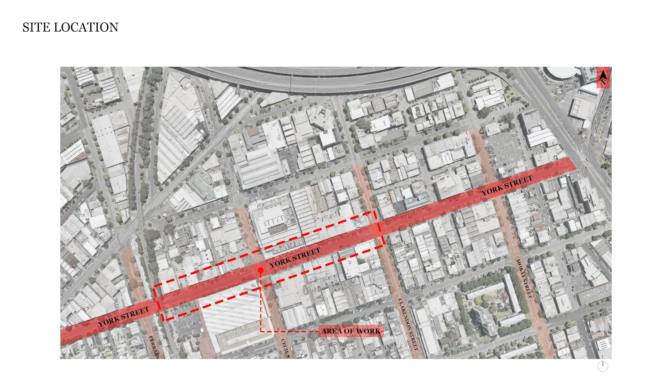The selected site location is a portion of the street comprising 2 blocks. It is an industrialized and urban area, with the highlighted area being red. Looking at the site features of York Street, you can see that there are 3-meter wide long walkways, as well as a large road and parking on both sides.

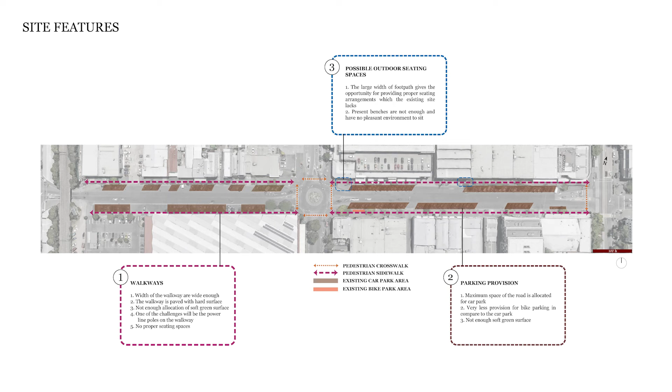Further notable street features will be small trees, power lines and poles on only parts of the road, wide pavements, and that the road surface has very little to no green space and or permeable land.

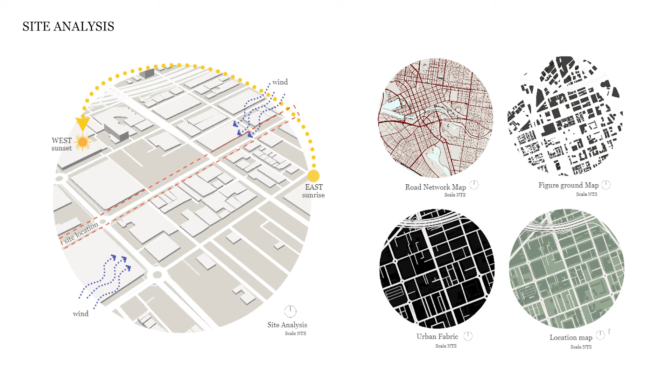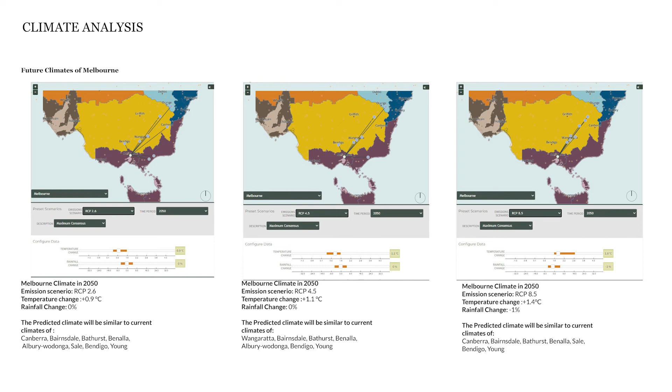We did some simple site analysis identifying the urban fabric, the figure ground map, the location of the sun and wind paths. Another very important analysis is the climatic analysis, where we identified how climate will change within Melbourne in 2050 and how this change will affect the climate of this region in this time frame. This is very important in identifying trees and planting vegetation for the future, as not all trees and plants will be able to withstand this climatic change.

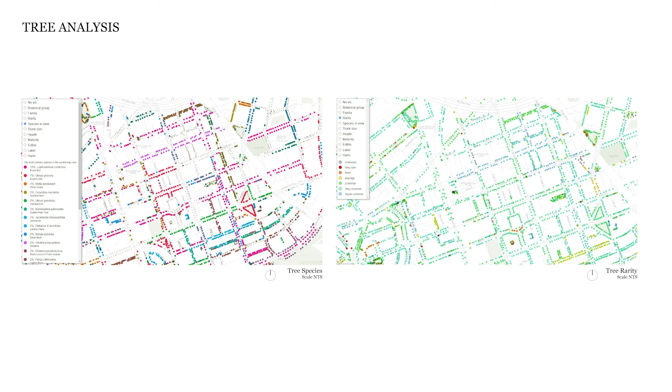A tree analysis was conducted. Based on the tree analysis, there appears to be only one tree type within the road, which is the Gleditsia tree, or honey locust tree. Having one tree type in a road is not good for urban forestry or diversity, and this is based on the urban forestry standards given from the Melbourne Urban Forestry.

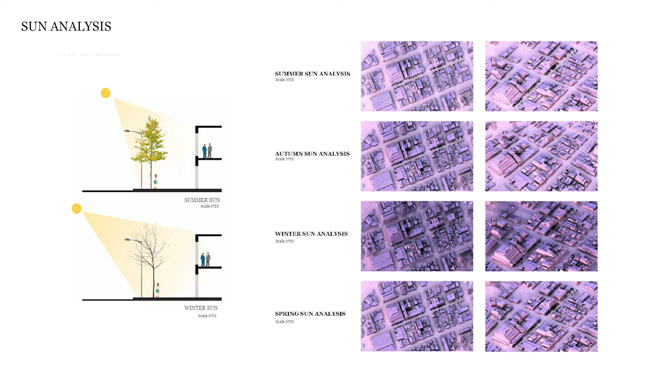A sun analysis was also conducted based on the tree selection. The tree should protect the surface from the sun during summer and allow for the sun to reach the pavements during winter, as Melbourne's winter is cold and wet, and summer is hot. A variety of both deciduous and evergreen trees should be planted so that throughout the year they will be covered from rain as well as from the sun during summer.

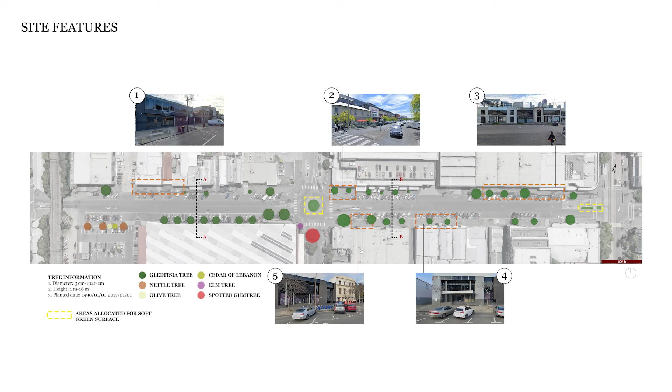Here's just an image showing you some trees on site and the features, as well as a section where you can see the large pavements and the small trees.

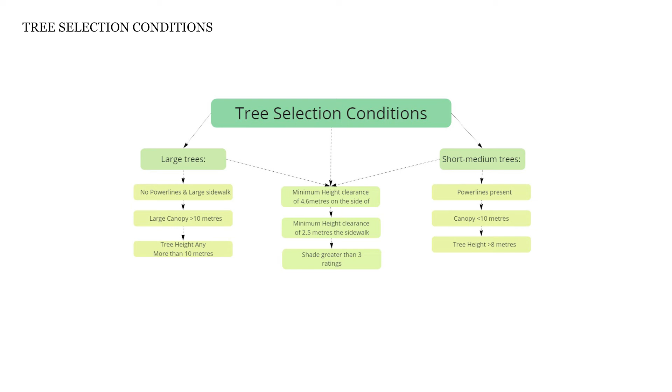Looking at the tree selection criteria, both large trees and small trees require 2.5-meter height clearance to ensure that they do not damage power lines. It is best to place large trees where there are no power lines and small trees where there are.

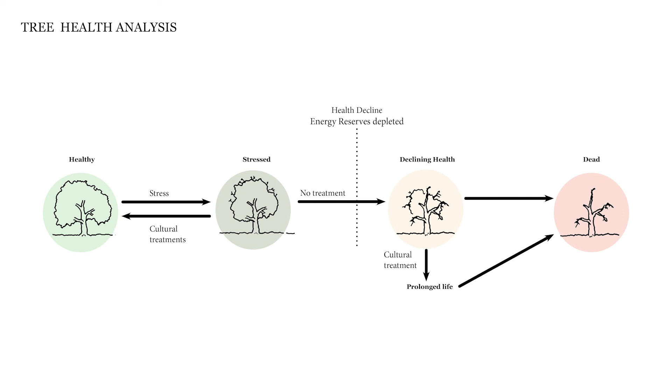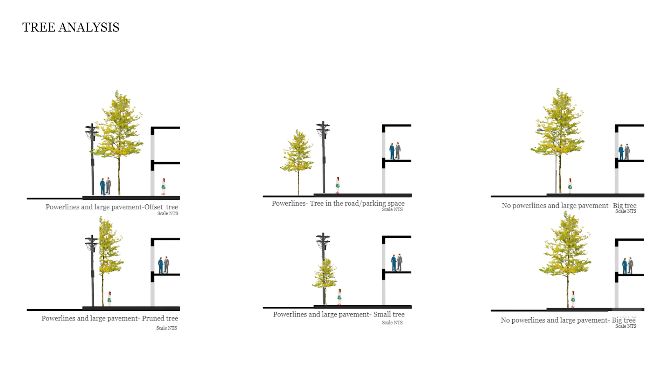Larger trees can be seen being placed where there are no power lines and smaller trees where there are. If a tree is large and placed by power lines, it will be pruned and lose most of its canopy, which defeats the entire purpose.

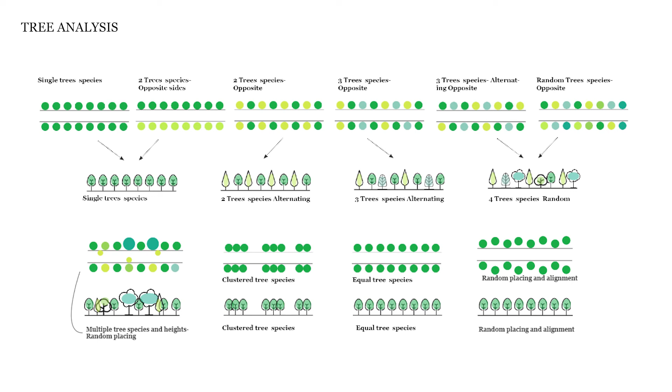Positive implementations are to increase tree canopy, existing tree health, tree diversity, improve the streetscape, increase surface permeability, including improve the community, and increase the urban ecological biodiversity.

Our master plan for York is to add diversity to these spaces by placing trees in parking spaces approximately every fourth parking space where applicable, as well as adding trees between some of the existing ones. The trees being added should be placed randomly to ensure mixed placement.

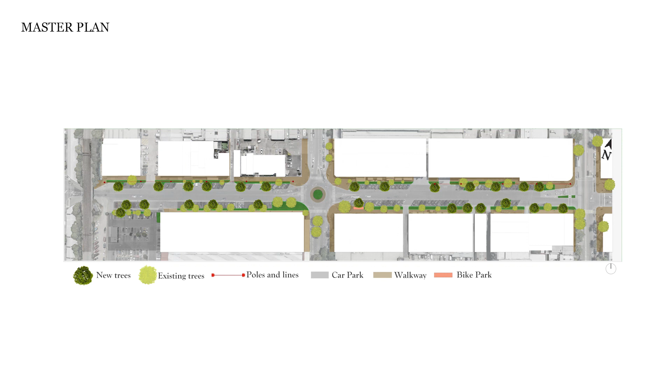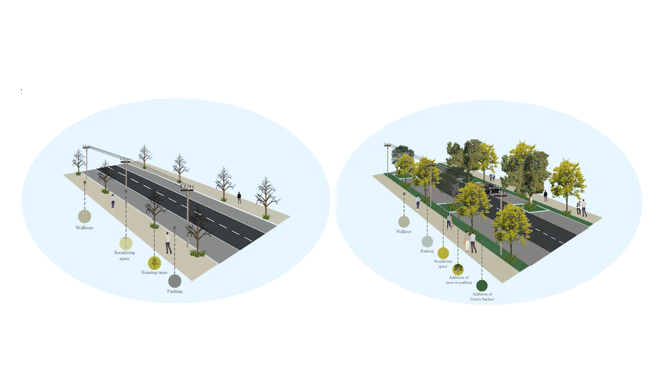We're also adding green strips towards the end of each block and along the pavements to increase surface permeability and help with water runoff. By removing some of the parking spaces, we would like to encourage more people to use bicycles within the area. The next image is just a comparison of the existing streetscape and the proposed new streetscape, as well as the 3D mapping showing the trees that's being added.